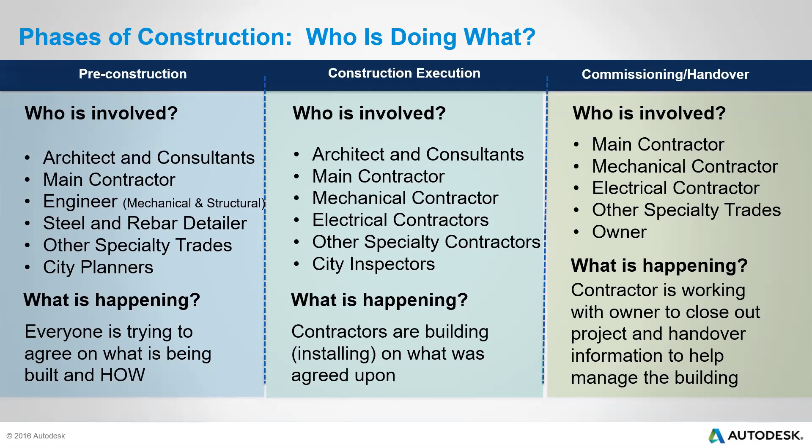So before we go into the details of the pre-construction workflows, we'll look at the phases of construction so we can have an idea of who is working in what area. We have the pre-construction, which we'll be talking about. We also have construction execution, which is the actual process itself, and then commissioning and handover. For pre-construction, we have the architects, main contractors, engineers, and in this phase, what is happening is everyone involved is trying to agree on what is to be built and how it is to be built. That is the thing we'll be focusing on today. We'll leave the other areas and just move on to the flow of information.

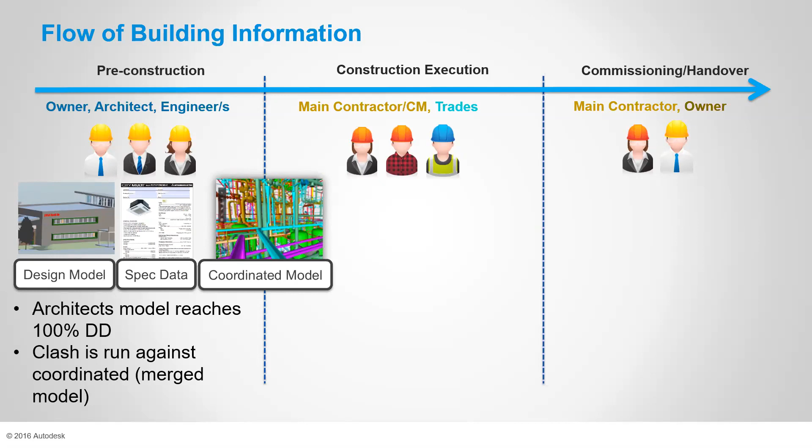So what happens is information starts from the initiation of the project until the commissioning and handover. And in the pre-construction stage that we're interested in, it starts with the design model itself, generates specification data, and you have the coordinated model, which spills over into the construction execution stage. So the output generally consists of your documented design documentation and running clashes to ensure that clashes are detected. We'll move on to the first aspect of the construction modeling phase for pre-construction.

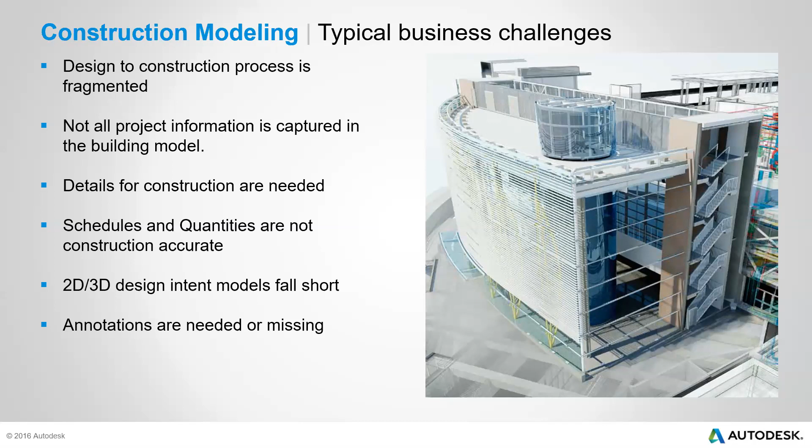Now, construction modeling has the following typical business challenge. The design to construction process is fragmented. It is not holistic, it's not in one place. And you find out that all the information required to construct the building is typically not captured in the model itself. You require extra details for construction, and even the schedules and quantities are usually not construction accurate, meaning that they are not accurate enough for construction information. You have annotations that are required or they are still missing.

So how would an ideal construction modeling workflow look like? You'll be able to have insight that would enhance the constructability of the project at an earlier stage in the process. You have access to multidisciplinary building content to enable you better manage the project. And you'll be able to extend your BIM data for use in clash detection, construction analysis, and fabrication. There are a lot more of these characteristics, but what we now have is the Autodesk workflow for construction modeling, which we refer to as the collaborative construction modeling.

It has a suite of different softwares where information flows from one to the other to achieve the following: create a constructability model, then to update the central model you're working on. You know, we said you're working in a project-centric process. To have direct access to all team members for clarity, to be able to organize your documents effectively, and to extend the workflows in Navisworks.

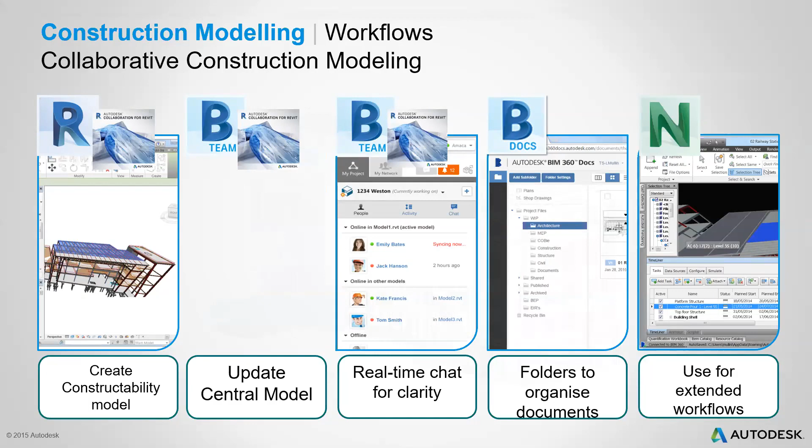So we'll look at a short video that gives an overview of this. Please mind that some of the names of these softwares have been merged into BIM 360 platform.

When construction companies receive design models, they will likely need to create a constructability model to add more detail to the project. Using tools such as Autodesk Collaboration for Revit, BIM 360 Team, and BIM 360 Docs allows the entire team to work on the constructability model from any location. To get started, the VDC or BIM manager will create a project on BIM 360 Team. After the project is created, they can invite team members to the project and choose what role they will have on the project.

Using Autodesk Collaboration for Revit, the VDC manager will then upload the project to BIM 360 Team. Once the file is uploaded, the other team members can access the project from within Revit and begin to create the constructability model. To collaborate in real time with other team members, use the Communicator tool. This will ensure that everyone is on the same page and will keep a record of the decisions that are made along the way.

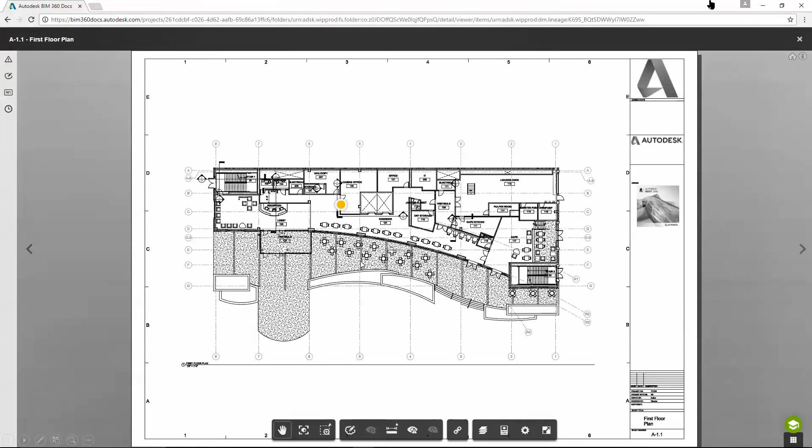You can also view the project's Sync with Central activity from the Timeline tab in the Communicator. Once the constructability model has been created, the model and documentation can be uploaded to BIM 360 Docs, so the entire team has access to the information from any location. Also, BIM 360 Docs allows you to create a folder structure, so project information can be organized and easily found.

Utilizing the cloud for collaboration ensures the entire team has the latest project data whenever they need it. It also provides easy access to the constructability model for extended workflows, such as creating quantity takeoffs, project schedules, and clash reports in Autodesk Navisworks or BIM 360 Glue.

Okay, so that's the first workflow we have in the construction modeling process. The next is construction detailing, which entails you creating detailed schedules, communicating these details using advanced drafting tools, and ability to have revisioning and markup included.

Many construction companies are using Revit to develop detailed 3D constructability models. However, most job sites are still using 2D drawings. This requires the VDC team to produce 2D representations of the constructability model using Autodesk Revit's advanced tools for drafting and scheduling. Because your 2D drawings are outputs from your 3D model, if something changes in one view, all the others are automatically updated. Revit also provides the ability to create 3D views with exploded details, which allows you to better convey the design and intended installation to workers on site.

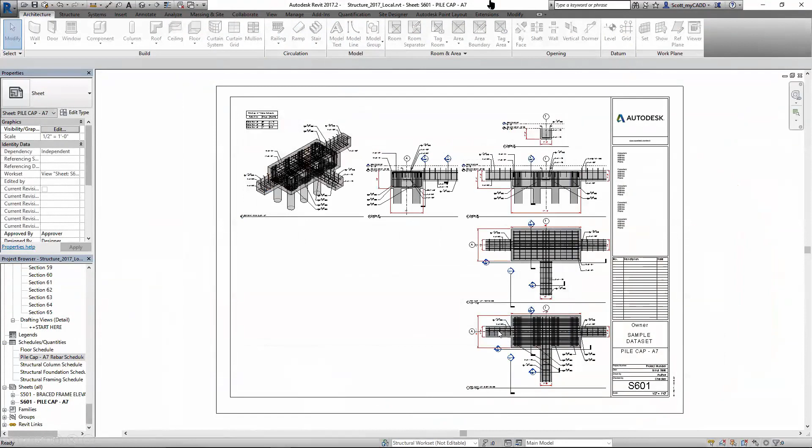Many subcontractors use a 2D workflow to produce shop drawings or communicate with their team in the field. The general contractor or architect can provide subs with 2D background drawings created in Revit for use in AutoCAD. This allows them to continue their work in one of the most powerful detailing engines available to produce their 2D documentation. With cloud connectivity to AutoCAD 360 or BIM 360 Docs, you can easily share documentation for markup and review with the entire project team, regardless of their location.

No drawing set is complete without descriptions of the materials and the assembly details, which is why adding annotations, line work, detail components, schedules, and quantities is a crucial phase of the complete BIM workflow.

Okay, so what we've been doing so far is focusing on the pre-construction stage, which is to ensure that we have sufficient information, enough to verify if the project can be constructed, and to handle the scheduling, the quantification, all the things that should go on before the project starts, that if handled very well, would minimize the risks that are typically associated with the construction project.

So we'll go on to the quantification workflow, the process, and look at the typical business challenges faced by construction professionals. For quantification, the issues are that we need to have more accurate and reliable material quantities and cost estimates, and to be able to reduce the risks to profits on the project that come from exceeding budgets, and to reduce the manual processes that take so much time, are error prone, and can result in having inaccurate estimates.

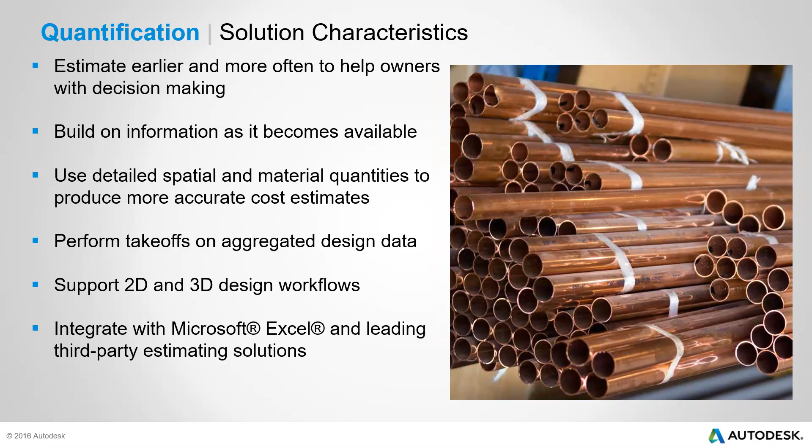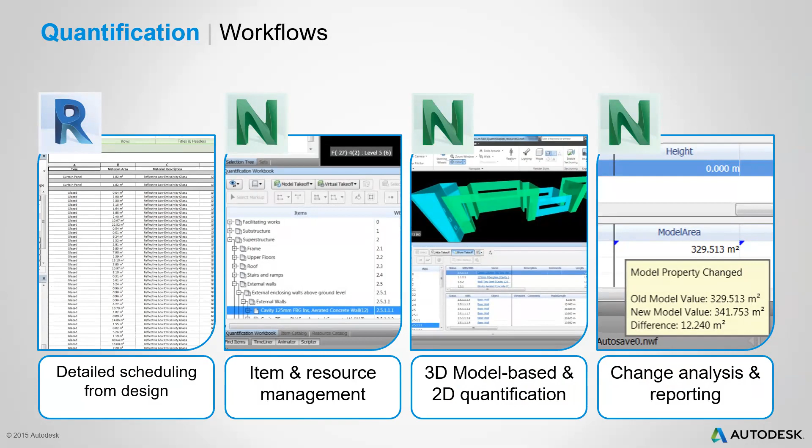So we'll go on to the workflow for quantification, which is split into the detailed scheduling from design using Revit, item and resource management, 3D model-based and 2D quantification, change analysis and reporting using Navisworks. So you can see that what we're doing is pairing the software, like I said before, as information flows through the entire construction timeline, it also flows through the software as well.

So this short video gives us an overview. Today's estimating processes rely heavily on 2D documentation and manual counting of project elements and components, which can be error-prone and very time-consuming. Leveraging a model-based workflow for quantification can reduce the time it takes to generate project quantities and enables workflows for adding valuable construction information to project elements during the process.

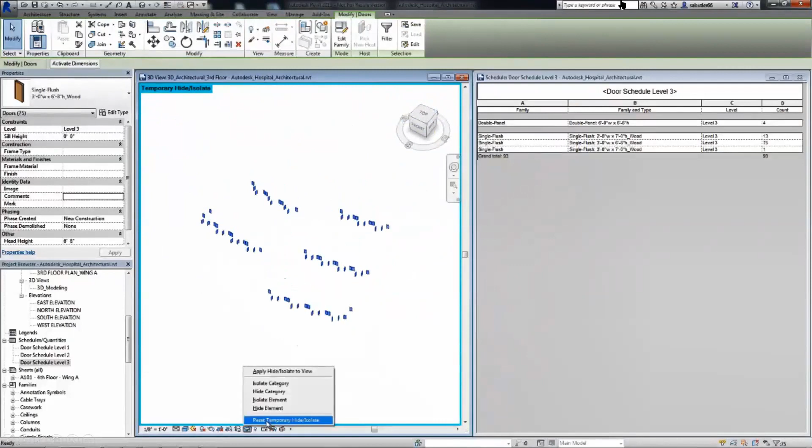Here we see how the Autodesk Construction Solutions offer several ways to gain access to the quantity information early in the planning process. By leveraging tools directly from the modeling applications, we can quickly get a high-level understanding of the project quantities. Schedules, or tables of data built from the model, created by the designer, can be used by adding counts and totals, or a custom table can be generated on the fly to give you the feedback and quantities from the model information immediately.

Here we are working with item and resource catalog information in order to classify the model elements further than the model authoring tools can. With the catalogs available, we quantify the model using intuitive and easy-to-use tools in Navisworks. The quantification workbook is our central location to create and manage the quantities within our model. We simply select an appropriate item within the catalog for quantification and can either drag and drop elements from the model to the appropriate items, right-click on any model element and select the catalog item to use, or use a toolbar to quantify the elements on the fly.

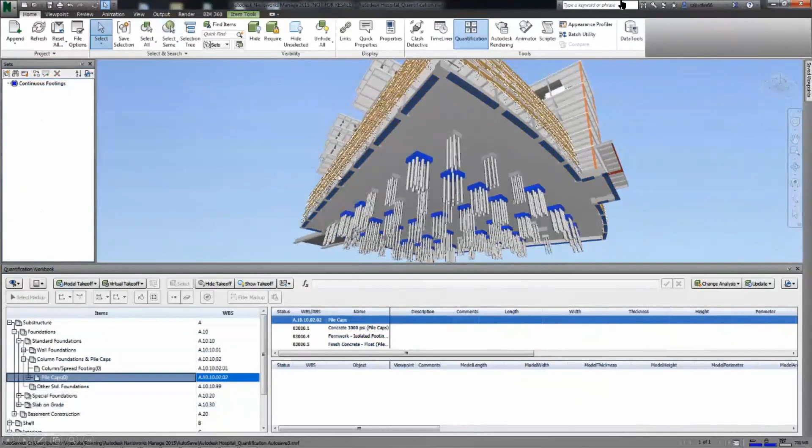As we see here, once elements from the model are quantified, their display in the model is updated with the color and transparency settings from the catalog. This ensures that we see exactly what has been quantified and can quickly toggle between showing the model elements that are done versus the elements that haven't. The workbook also leverages the item breakdown structures and the resource breakdown structures, in that we can see a roll-up of the total quantities for an item collection with its resources, as well as the individual elements' detailed data. To complete the quantification of the model, we simply continue to walk through the workbook and pull model quantities into the system.

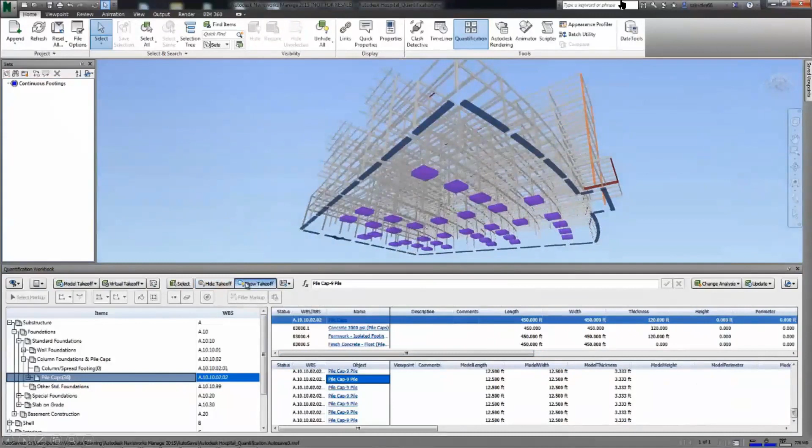2D takeoff can now be done using the new intuitive and easy-to-use 2D takeoff tools directly in Navisworks. This can be done by opening the item catalog, drilling down to the appropriate categories, and adding the new items we plan to take off. Drawings can be cleaned by using the Hide Background and Annotations tool in the Navisworks Quantification Workbook. This allows you to hide all of the notes, room names, section markers, and more.

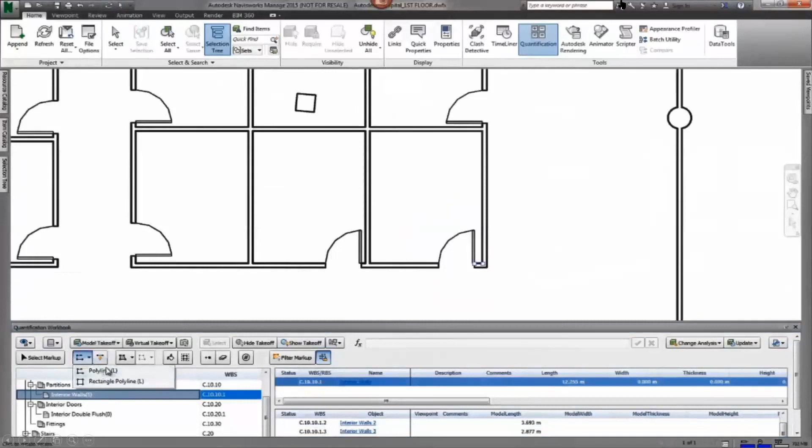We start by selecting the item type in the Quantification Workbook. Here we are taking off walls by selecting the wall line and then wall line type. We can also use other tools such as the Polyline tool or even the Rectangle Polyline tool. As we are taking off these items, they are being individually added to the Quantification Workbook, as well as being added together for a total. We can edit any line that we previously placed. We can add multiple elements at a time through the selection tree. Select the elements we want to take off to interior walls, and the Navisworks Quantification Workbook will be updated.

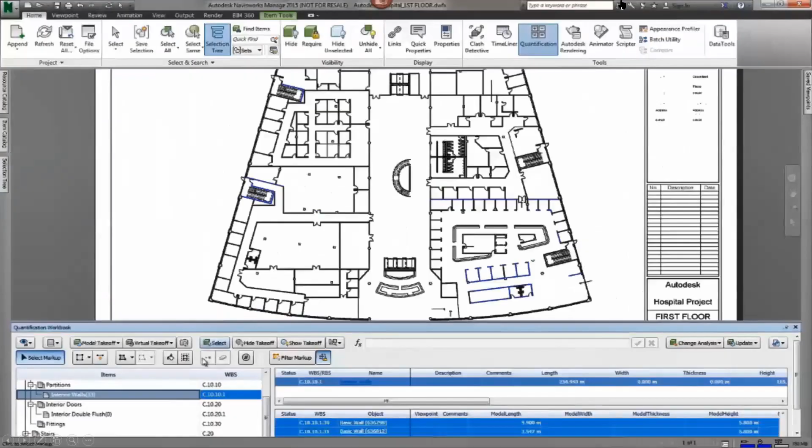Another challenge the quantification and estimating of building projects faces on a regular basis is the fact that project information inevitably changes. With a model-based approach and the use of the Autodesk Construction Solution, the management of changes is easy and effective. Because we are working with a model, the changes can be incorporated and tracked using Navisworks very easily. We see that the model within Navisworks has been refreshed, and we run an analysis for the quantities to see what has changed. An intuitive set of icons is showing us the changes and how they affect the quantification, along with tooltips that display the details of the changes. We can either accept the changes and they are incorporated into the new quantification, or we can remove the existing quantities and perform a fresh takeoff for the new or updated elements.

Okay, so that is for the quantification. Please, if you have questions as we go through each of the workflows and segments, just type it in now so that you do not forget.

Okay, we'll go on to pre-construction coordination next. Now, what are the typical challenges of pre-construction coordination? Projects are becoming more complex while delivery times are reducing. We have contributors at varying skill levels. Some are using 2D only, some are using Revit, some are fully BIM compliant, some are even using other software that gives them different file formats from what the team is using.

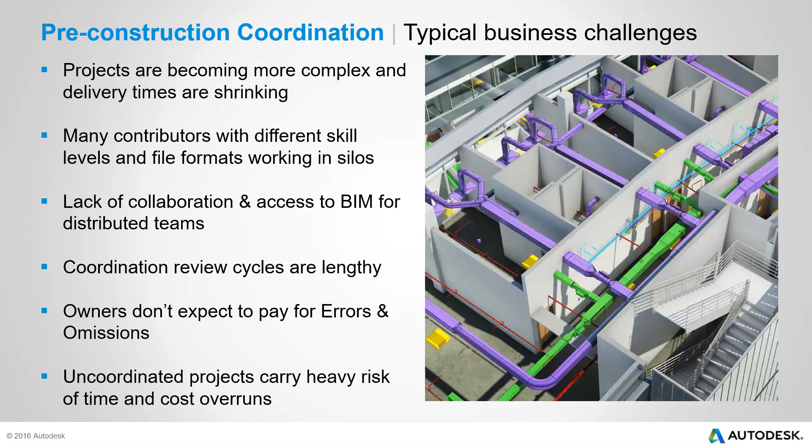We have a lack of collaboration and access to BIM for distributed teams. Coordination review cycles are quite lengthy, and owners typically do not expect to pay for mistakes that come from the team. So, what should the solution look like? You should have access anywhere at any time to the latest project models and data.

And the Autodesk solution helps to speed up project reviews and ensures that multidisciplinary teams can quickly identify and resolve pre-construction coordination issues. You can see this image here where the undetected clash has led to this creative solution. You should be able to have cloud-connected workflows for BIM coordination, collaboration, and analysis to ensure that all of these errors are detected early in the design process.

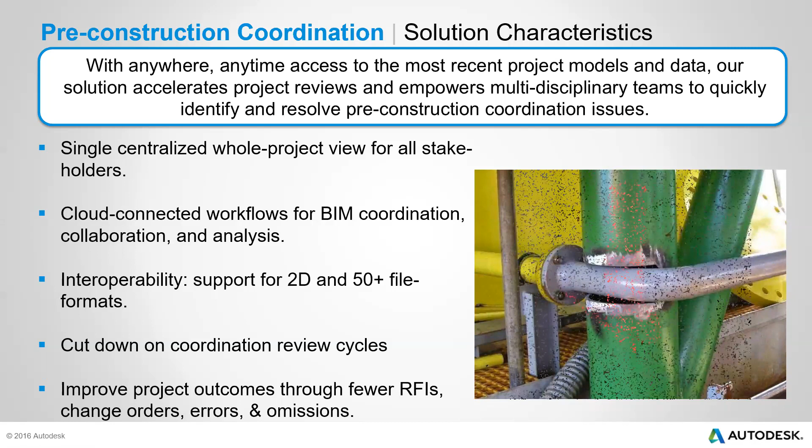So this is what happens when you carry out the pre-construction coordination properly. You detect such errors early enough and you can correct them without having to get to site to create on-the-fly solutions. You also have support for 2D files and 50 plus different file formats using the Autodesk solution. So the problem of being on another software or the file format being incompatible is resolved.

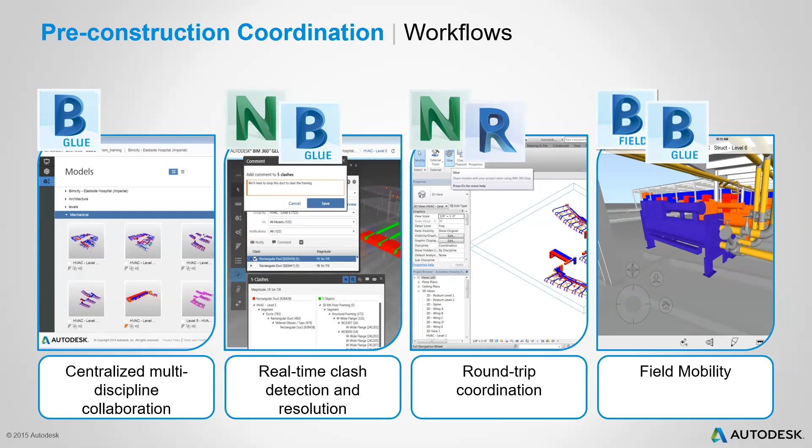So for the pre-construction coordination workflows, we have the following flow: from centralized multidisciplinary collaboration to real-time clash detection and resolution, round trip coordination, and field mobility. These are all different workflows that we'll walk through one after the other. We start with the centralized multidiscipline collaboration using BIM 360 Glue to manage all the different file formats, the versions, to create markups, and to send notifications and one-click access to BIM to all the professionals on the project. This next video gives us an overview.

Centralized multidiscipline collaboration is simple with Autodesk BIM 360 Glue. The first step in team collaboration is uploading discipline-specific project models to the BIM 360 Glue service. This can be accomplished using the BIM 360 desktop application. Simply select Upload Files, where you can drag and drop your project file or browse your computer. BIM 360 Glue supports over 50 file types, ensuring support for a wide range of design applications.

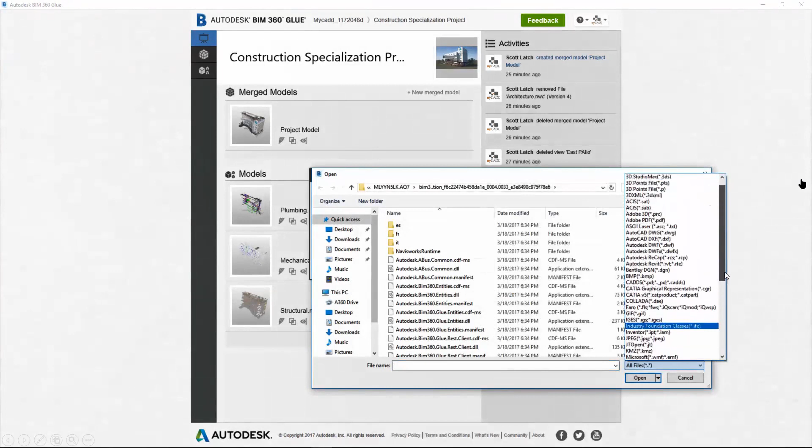A more efficient method to connect with Glue is to upload your models directly from the authoring application. This will allow you to regularly upload your model to BIM 360 Glue without leaving the application. In this example, we will upload a project model from Revit in just a few steps. First, create a 3D view in Revit that displays all the model information you'd like to include. It helps to rename the view to match the name you would like to have in BIM 360 Glue, but you can also rename the model before uploading to Glue.

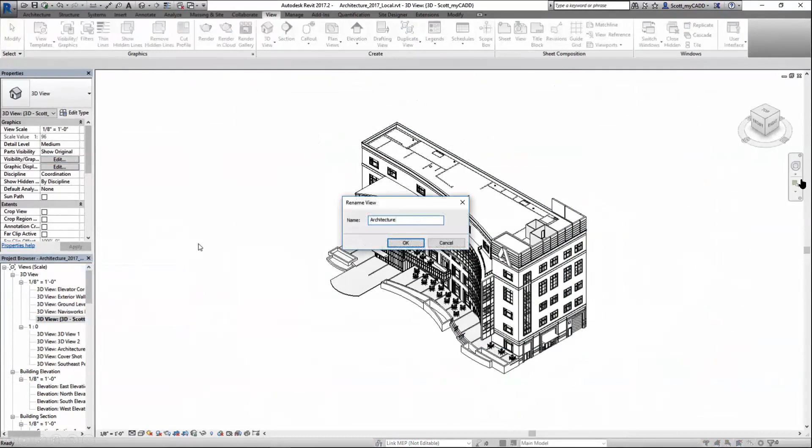Go to the Add-ins tab and click the Glue icon. You should have already been invited to a project or set up your own project on BIM 360 through the Account Admin settings. Select a project from the list. Now select a view to upload as your model. Choose the 3D view you have created and click Glue it. A status bar showing that the model is uploading appears, and you will be informed that your model is being glued. Once the model has been successfully glued, you will be notified. This process should be repeated for all the project models.

We now move to the BIM 360 desktop application, where we will merge the discipline-specific models that have been uploaded. Much like uploading the project models, merging can be accomplished in just a few steps. First, in the Merged Models section, select Add Merged Model. This will open a dialog box showing each of the projects that have been uploaded to BIM 360 Glue. Select the models you would like to merge, give the merged model a name, and select Merge Models. This will open a view of the merged model where you can check for clashes, create views and markups, and notify the team of this activity.

As projects continue to move forward, having the most up-to-date project documents is critical. BIM 360 Glue allows you to view the version history of any of the uploaded models. To see the current version of a model, hover the cursor over a project. To view the version history, right-click on the model and select View Details, which opens a dialog box where you can see a list of versions in the lower right corner.

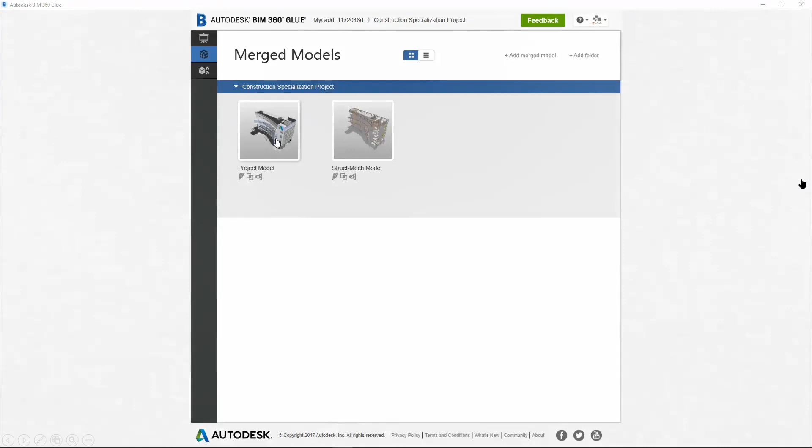Once the models are merged, you can begin to perform various collaboration tasks, such as checking for clashes or creating views with markups. In this example, we will create a view and create a markup that can be communicated to various team members. First, open the merged model. Notice the tools in the upper right-hand corner. The first thing we are going to do is turn off sections of the model using the Models tool. This allows you to limit the elements visible in the view you want to create.

Next, we will create a view by selecting the Views tool. In the Views dialog box, notice you have the option to create views just for yourself or a shared view. In this case, we want to share this view with the team, so we will select the Shared Views section. Now, click on Add View, give the view a name, define who has access to the view, and click Save. Now, we're going to navigate away from the view to see how easy it is to get back to it once it has been defined. It's as easy as selecting it in the Views dialog.

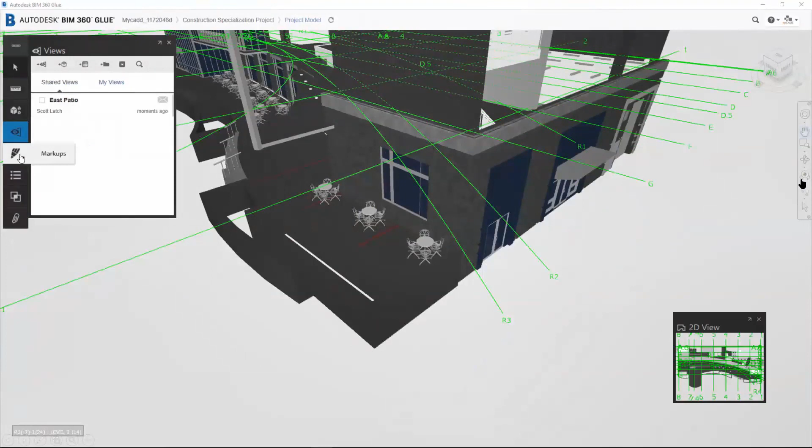Now, we will create a markup in this view. Simply select the Markups tool and click Add. This will open a palette of markup tools at the top of the window. Let's change the color of the markup. Select the Freehand tool and draw in the view. Then select the Text tool to add a note and click Save. Notice the markup is specific to that view. When I navigate away from the view, the markup disappears. If I go back to the view, the markup will reappear.

All activities are tracked in BIM 360 Glue, ensuring the team is aware of everything going on with the project. You can see the activities specific to the merged model by selecting the Activities tool. You can also see the activities for the entire project by selecting the project name or by going back to the main project page and viewing the Activities section on the right-hand side.

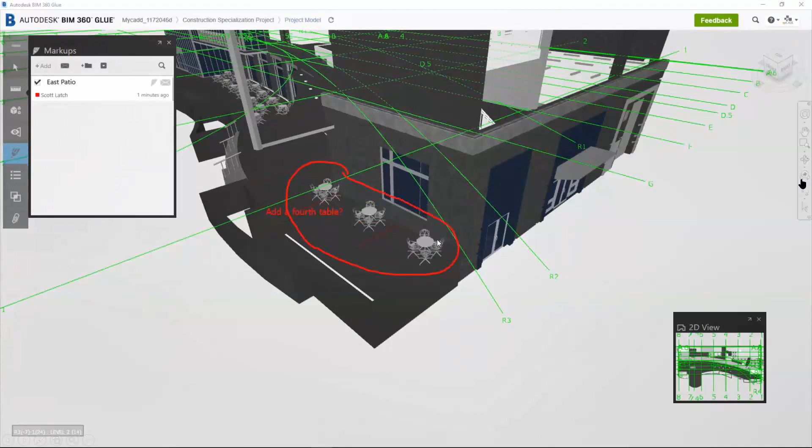Now that we've created a markup, we're going to communicate that markup to the owner, because he isn't always monitoring the activity in BIM 360 Glue, and we want to make sure he's aware of this change. We are now back at the markup we created earlier. To communicate this view to the owner, select the Notify icon in the Markups dialog. Select the owner and add an optional message. Then click Send. The owner will then receive an email notifying him of the markup. You can even go into the activities, select multiple items, and notify a team member about them.

As you have seen in this video, it's easy to upload models, merge them, create views and markups, and keep the team up to speed on all the project activity, whether they are in BIM 360 Glue or not.

So if you see the trend that the different workflows we've been showing you reveal, it's that the cloud is the point where you can carry out a lot of these activities. Don't forget, it is not limited to any location. You can gain access from mobile devices, from your iPad, from a laptop, whether you're on site or you are in the air, making sure that the anchoring to the computer in the office is removed.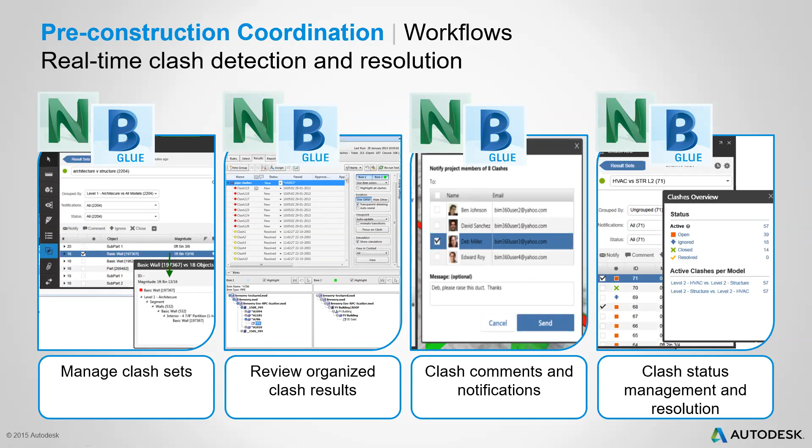So we'll go on to the next workflow in the pre-construction coordination process, which is real-time clash detection and resolution. The two software titles we'll be using are Navisworks and BIM 360 Glue, which will help us manage clash sets, review organized clash results, clash comments and notifications, and give clash status management and resolution. This next video gives us an overview. Yes.

Clash detection done on the job site usually results in change orders, causing material waste, added cost, and added time to a construction project. Using Autodesk BIM 360 Glue's Clash Review allows the team to find and resolve potential issues right in the cloud before construction begins, resulting in less issues during construction. Let's start by checking for clashes using one of the merged models already in the project.

In the Merged Model view, start by selecting the Clashes tool in the Tool palette. Click New in the Clashes dialog to create a new clash set. Select the portions of the model you want to compare, give the clash set a name, and click Find Clashes.

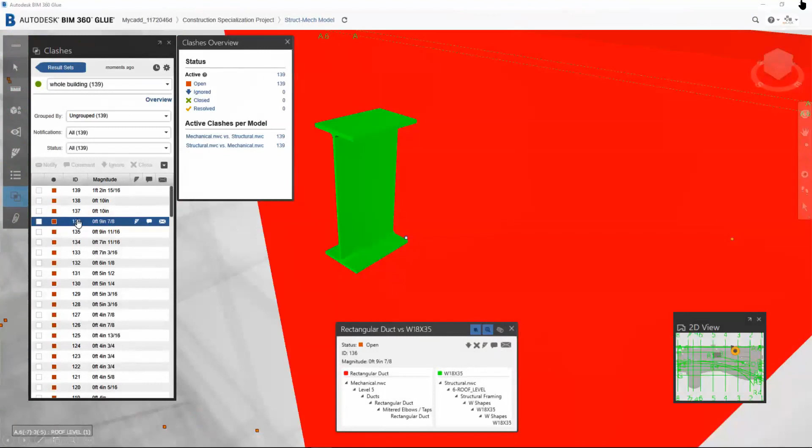You can see the results of the review in the Clashes dialog and in the model. In the Clash Results dialog, you can see the status and click to navigate to each of the clashes in order to view the objects that are clashing. Navigating from clash to clash is a quick and easy process.

Now that you know where the clashes are located, you need to communicate these issues to the team. Using BIM 360 Glue makes this process easy by adding a markup or comment to each of the issues, or leave them as is.

Then select a series of issues and notify the team members via email.

In addition, anyone with access to the project in BIM 360 Glue can also view the clash set, comment on clashes, notify other team members, or change the status of a clash.

Now that clashes have been found in the model, the individual model contributors can also review the issues directly in their design application using the Clash Pinpoint tool that is part of the BIM 360 add-in.

To use the tool, open a view that contains the clashing elements. In this case, we're going to open a 3D view so we can see the entire building. On the BIM 360 add-in, select the Clash Pinpoint tool.

Select the project and click Next. Select the clash result set you would like to use and click View. You now see the clashes we previously notified the team members about via email.

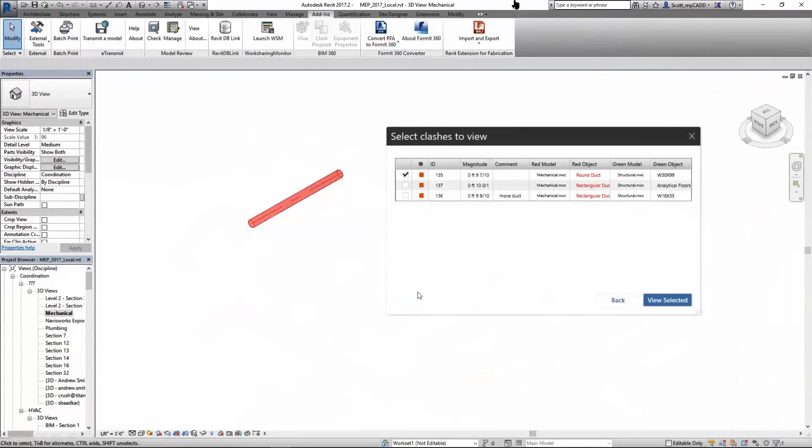Using the BIM 360 add-in tool allows each of the individual model contributors to easily find the clashing elements, fix the issue, and upload a new model to BIM 360 Glue once the issues have been resolved.

Over time, the number of issues in the clash results set will go down as the team resolves them. This will produce a better coordinated project that will be built on time, on budget, and with less waste.

So that is the end of the second workflow in the pre-construction coordination. Next we have the round trip coordination, which involves the use of Revit and Navisworks used together.

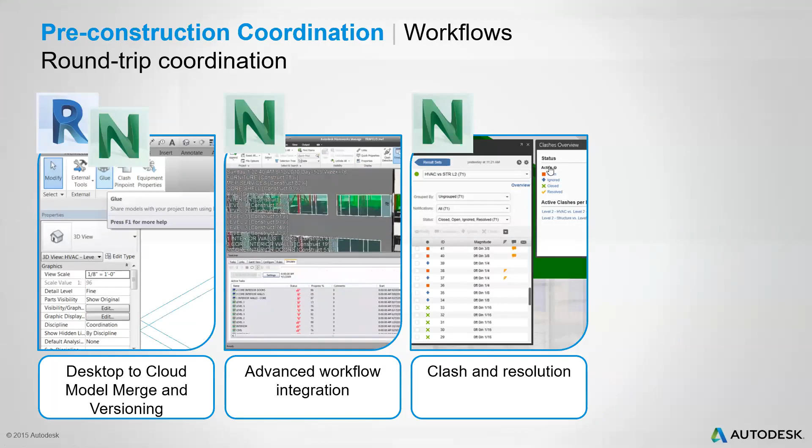Desktop to cloud model upload, merging, clash detection, and quantification are made easy with round-trip coordination.

The first step is uploading discipline-specific project models to the BIM 360 Glue service. To do this, go to the Add-ins tab and click the Glue icon. Select a project from the list.

Now select a view to upload as your model. Choose the 3D view you have created and click Glue it.

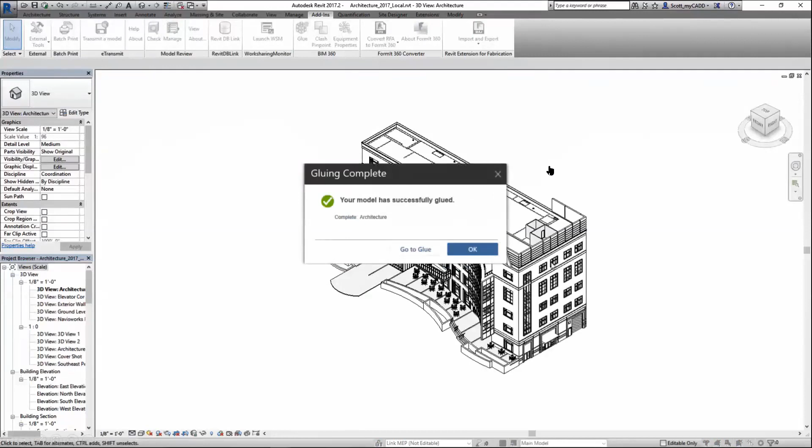A status bar showing that the model is uploading appears, and you will be informed that your model is being glued. Once the model has been successfully glued, you will be notified. This process should be repeated for all the project models.

We now move to the BIM 360 desktop application, where we will merge the discipline-specific models that have been uploaded. Much like uploading the project models, merging can be accomplished in just a few steps.

First, in the Merged Models section, select Add Merged Model. This will open a dialog box showing each of the projects that have been uploaded to BIM 360 Glue. Select the models you would like to merge, give the merged model a name, and select Merge Models.

This will open a view of the merged model where you can check for clashes, create views and markups, and notify the team of this activity.

Now, let's check for clashes using one of the merged models already in the project. In the Merged Model view, start by selecting the Clashes tool in the Tool palette. Click New in the Clashes dialog to create a new clash set. Select the portions of the model you want to compare, give the clash set a name, and click Find Clashes.

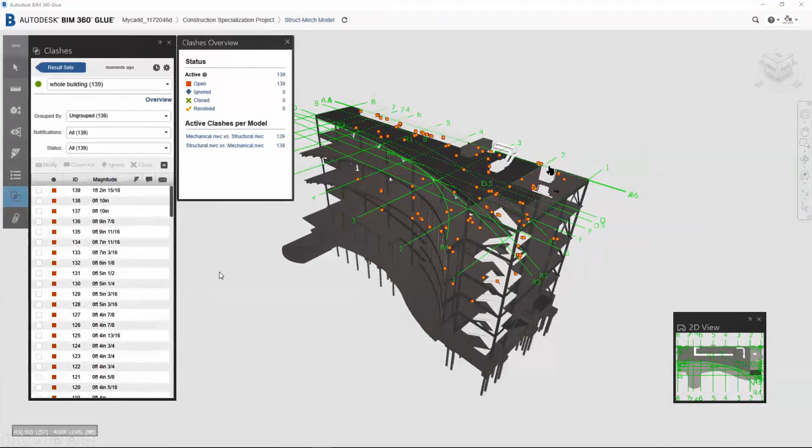You can see the results of the review in the Clashes dialog and in the model. In the Clash Results dialog, you can see the status and click to navigate to each of the clashes in order to view the objects that are clashing. Navigating from clash to clash is a quick and easy process.

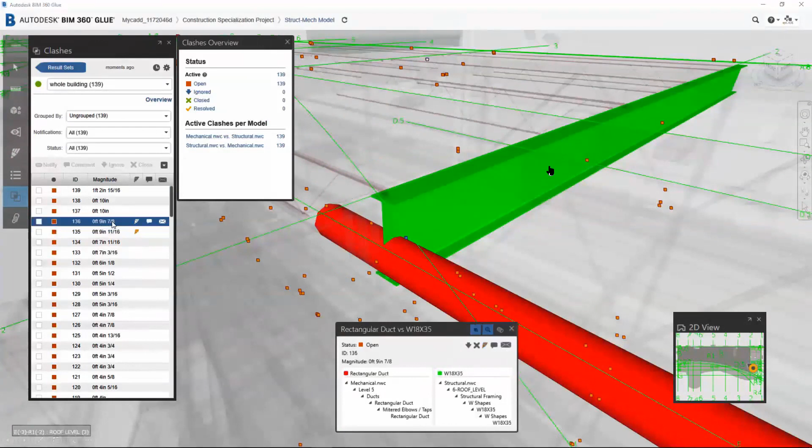Now that you know where the clashes are located, you need to communicate these issues to the team. Using BIM 360 Glue makes this process easy by adding a markup or comment to each of the issues, or leave them as is.

Then select a series of issues and notify the team members via email.

In addition, anyone with access to the project in BIM 360 Glue can also view the clash set, comment on clashes, notify other team members, or change the status of a clash.

As the project progresses, the models uploaded to BIM 360 Glue can be opened in Navisworks Manage and used for advanced workflows, such as scheduling and quantity takeoffs.

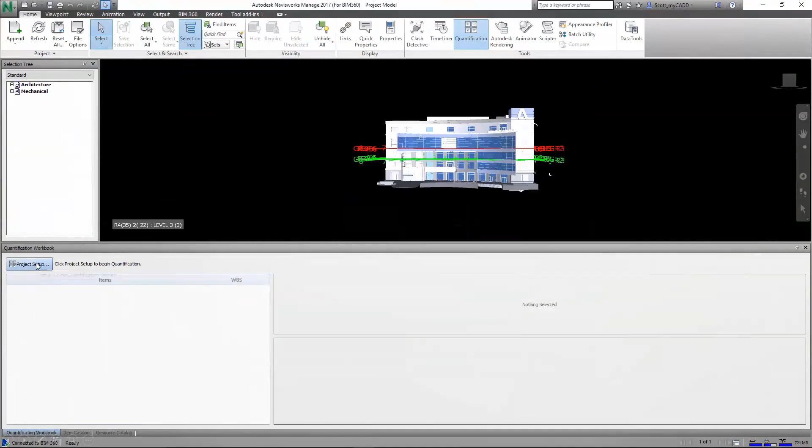In this case, we'll begin with the process of creating a quantity takeoff. We'll start by clicking on the project setup in the quantification workbook and select the catalog. Then select the project units, takeoff properties, and click Finish. This creates the data structure for your takeoff.

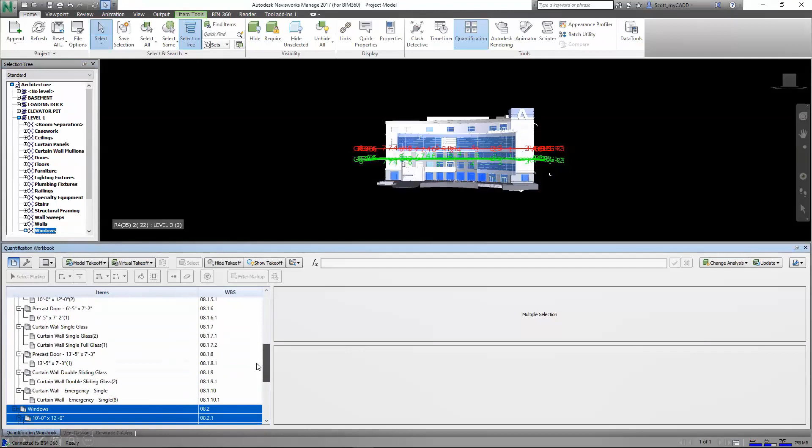It's then as simple as selecting elements in the model or selection tree and dragging them to the corresponding section of the quantification workbook. Once the quantification takeoff is set up, it can be updated as the model changes. You can also use 2D data sources to generate the takeoff for items with no associated model geometry or properties. Using these processes and keeping the project data up to date in the cloud provides the ability to do round-trip coordination.

So the last of the pre-construction coordination workflow is field mobility, which ensures that you are able to share information with stakeholders in the field. You can gain one-click access to the project files. You can easily navigate even on your mobile devices, and you can add comment markups and notifications.

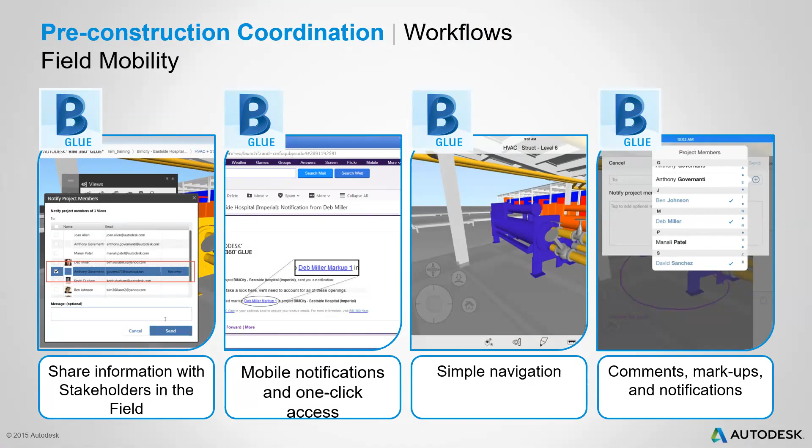Often, there is a need to share the information in your models with stakeholders who either aren't directly involved in the coordination process, like field personnel, or just need progress checks, like an owner or project manager. This is where mobility can play a key role in extending the value of a coordinated model to these consumers.

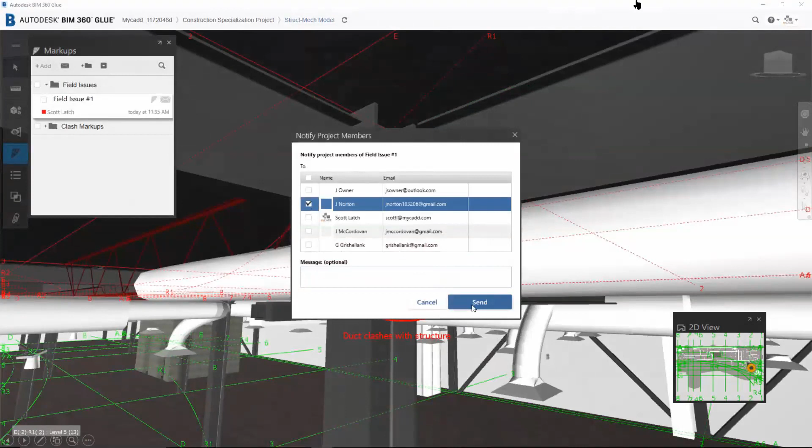The notification system built into Glue allows you to select the team members you wish to collaborate with, type out a personal note, and send an email to them all in one simple step. Once this is done, you can go back to your task of visual coordination without ever stopping the process here in Glue. The result is time saved in sharing information with the key project stakeholders and ensuring the team members needed are communicated with securely and efficiently.

When the email is received, all you need to do to view the model and markup that was shared is to select the hyperlink within the email that Glue sent. Glue will do all the heavy lifting, in that it will automatically launch, will load the exact model and version that contains the markup, and take the email recipient directly to the markup, streamlining the collaboration process with the mobile user.

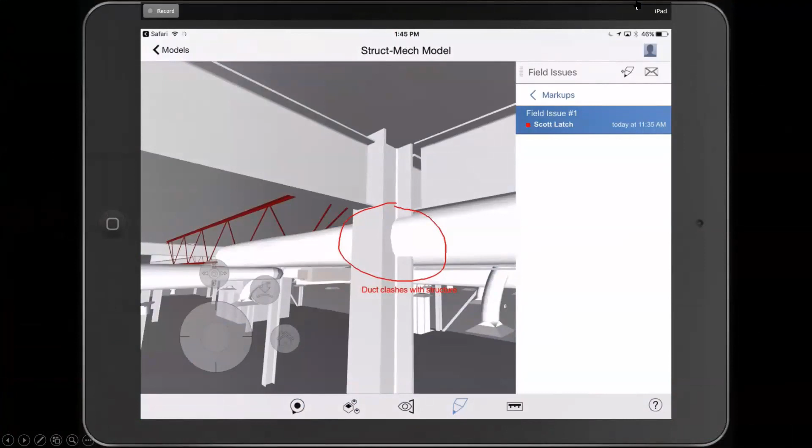From here, we can interact with the model using straightforward navigation, using gestures for zoom, pan, and orbit. Tools for measurement, where we can verify model dimensions while we are in the field, and even showing the X, Y, and Z differences. Finally, the remote user can send a comment back to another team member directly from the mobile app.

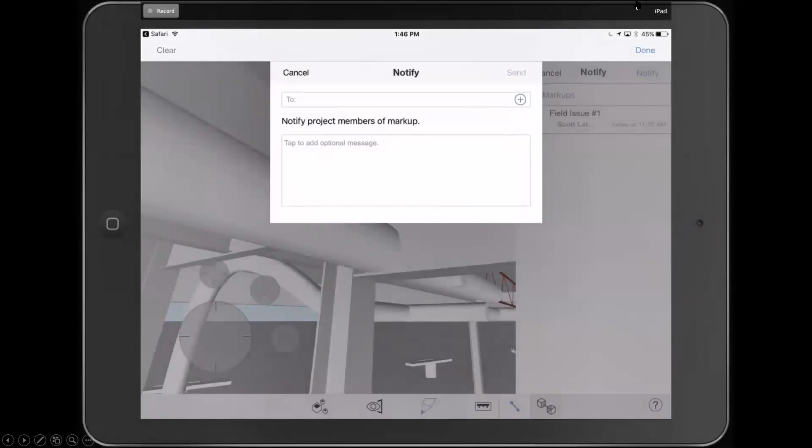Using the BIM 360 Glue mobile app provides access to the project regardless of the user's location, and provides the remote user with tools to collaborate with other team members.

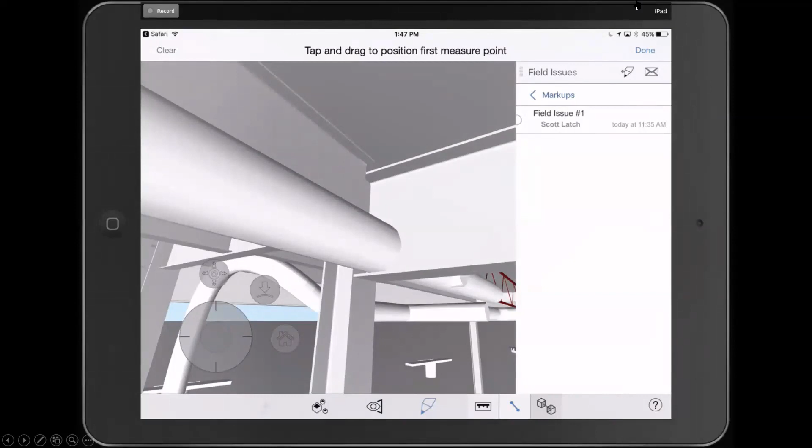Okay, so we'll move on to the planning and logistics phase. What are the typical business challenges faced in this phase?

The ideal situation would be that we are able to quickly visualize the proposed project within the context of existing conditions, that will be able to identify and resolve potential conflicts and address environmental and safety concerns before the construction even starts. That we will be able to quickly assess and quantify the impact that changes in the design and scope would have on all subcontractors and even on the overall project plan, and to explore options that you have based on trade-offs as you consider how to execute the work.

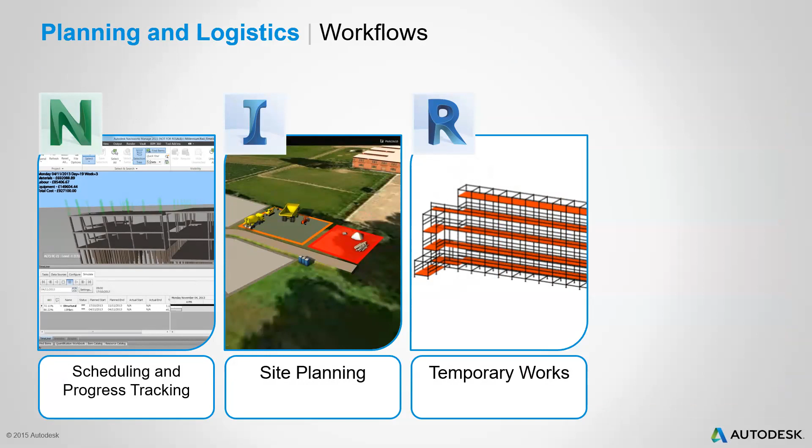So the workflow we have for this is a combination of three software that will manage the scheduling and progress tracking in Navisworks, site planning in InfraWorks, and temporary works in Revit and Civil 3D. So we start with the scheduling and progress tracking workflow, as shown in this video.

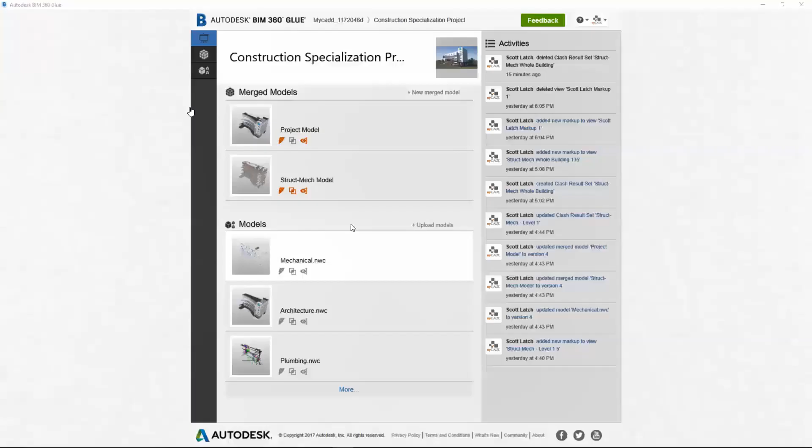Core to planning is understanding your schedule and project plan so you can assess the impact of changes and track progress. With cloud-based BIM coordination, project teams gain virtually anytime, anywhere access to connected project information. Autodesk BIM 360 Glue helps you perform multidisciplinary collaboration and coordination review cycles faster, while making construction layout tasks more efficient.

In Autodesk Navisworks, we can open the models saved in BIM 360 Glue and perform extended workflows such as creating a project schedule. This is done by easily attaching model elements, even at a preliminary stage, to a schedule of tasks. Elements can be selected from a list, grouped together with selection sets, or simply highlighted on the screen and dragged and dropped to the appropriate tasks.

Once we have a preliminary schedule and 4D simulation complete, we can easily export the data to an external third-party project scheduling application, such as Primavera or Microsoft Project, where it can be further refined, then linked back into Navisworks.

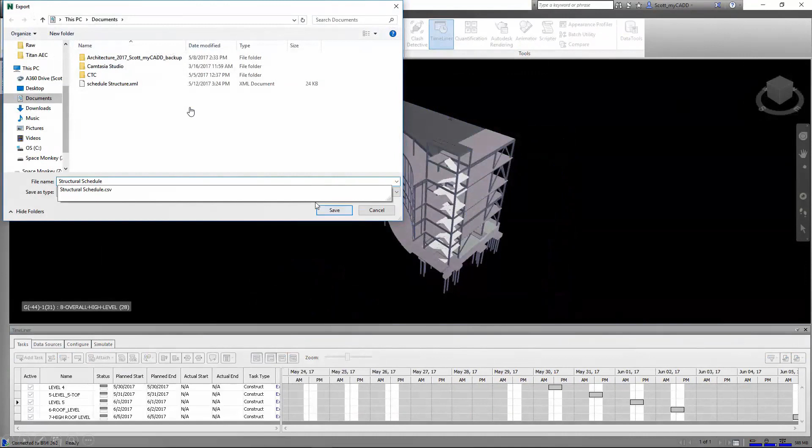BIM 360 field checklists provide the ability to collect data, such as daily updates, which allow contractors to better manage the process of daily job site performance reporting by providing a digital workflow that enables transparency of the collected information, which can be accessed by the project team at any time.

By capturing the information within the BIM 360 ecosystem, you can better understand and manage risk, as well as gain insight into trends and analytics that expose root cause detail and allow you to track the planned work schedule to the actual progress in 4D simulations.

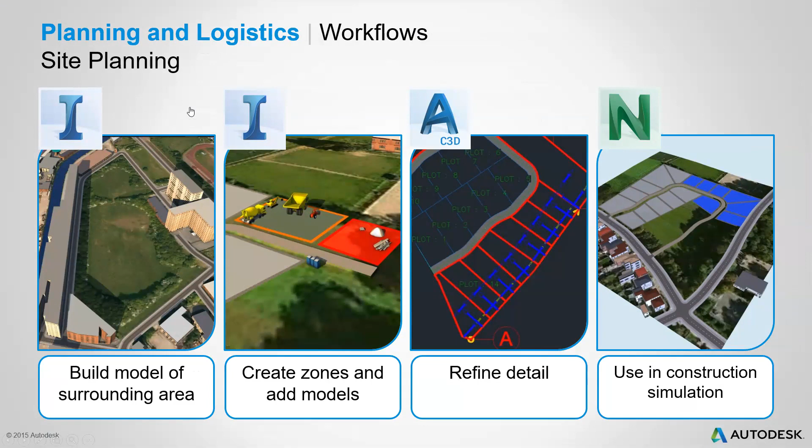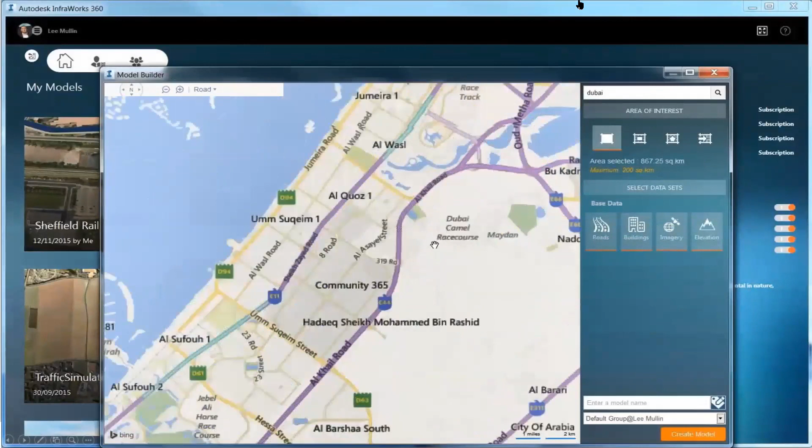Construction projects are more than just the building. There's the site as well. Using tools like Autodesk InfraWorks, Civil 3D, and Navisworks provides the team with insight into how to manage the site and the impact the project will have on the surrounding area.

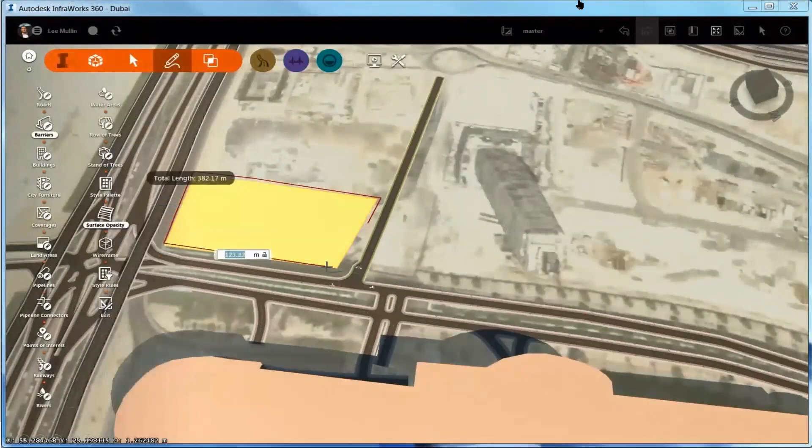To begin, site planning tools like InfraWorks allow you to quickly create a model containing terrain, roads, buildings, water sources, and aerial imagery. This allows you to start making plans for the site at different phases of the project by easily creating zones for material layout, walking paths, and so on. Also, using library content for cranes, vehicles, and site trailers allows you to quickly populate the site with relevant equipment.

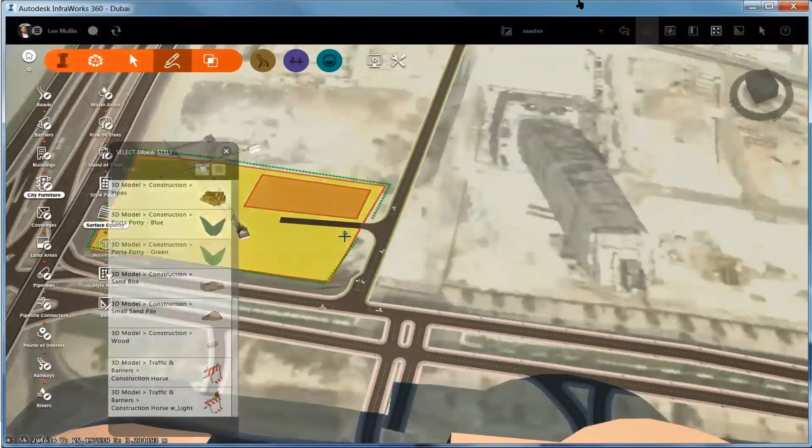Using these tools in InfraWorks allows you to quickly understand the context of the building and the effect the surrounding area may have on it. InfraWorks also has the ability to run traffic simulations, allowing you to look at alternate scenarios such as different entrance points to the site. Using the traffic simulator will provide the team with the understanding needed to lessen the impact on the surrounding area while maximizing the use of the construction site.

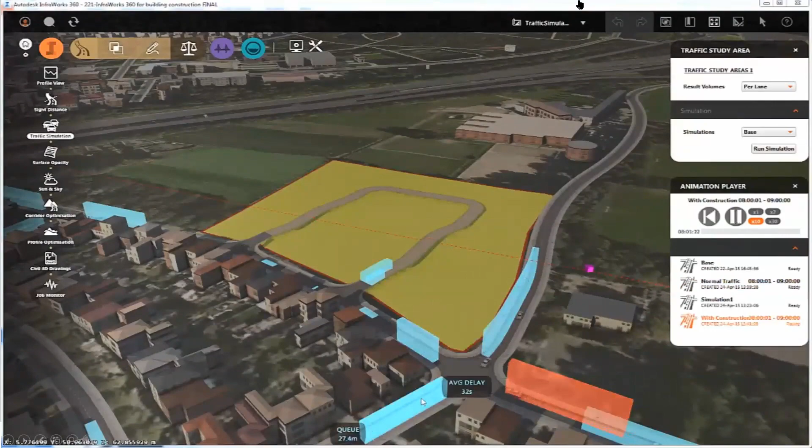As you continue to further refine the project site, you can leverage the Vehicle Tracking tool in Civil 3D to look at the movement of heavy equipment, such as cranes. This will ensure that you place materials, other equipment, and temporary site buildings in locations that allow for the equipment to move freely around the site.

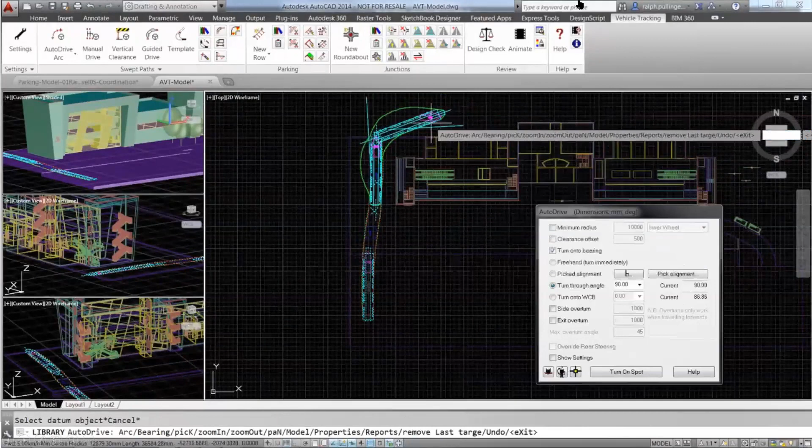Finally, you can export the site information created in InfraWorks into Navisworks and join it with project information created in other applications, allowing the team to link it to construction simulations and help visualize and communicate the site to workers.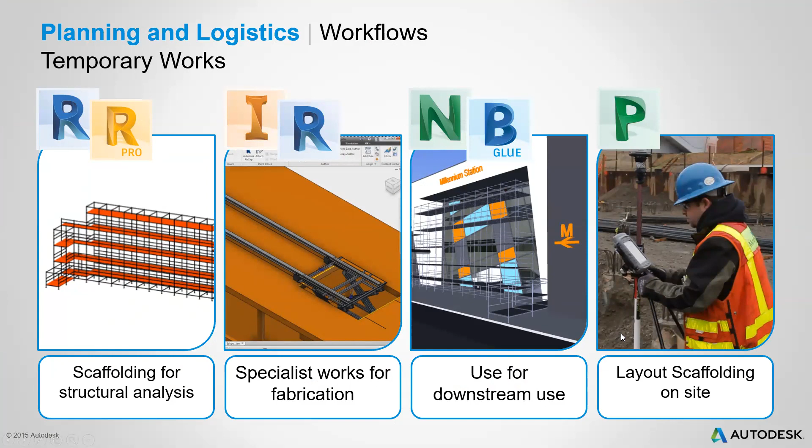The final workflow of the planning and logistics phase is the creation of temporary works, which would involve these different software tools. I'll go straight to the video to outline this process.

Temporary works are increasingly being modeled to take advantage of downstream uses such as layout, construction simulation, clash detection, and quantification, as well as obvious reduction in risk for health and safety. For example, a temporary scaffolding layout can be designed using Revit using custom scaffolding families.

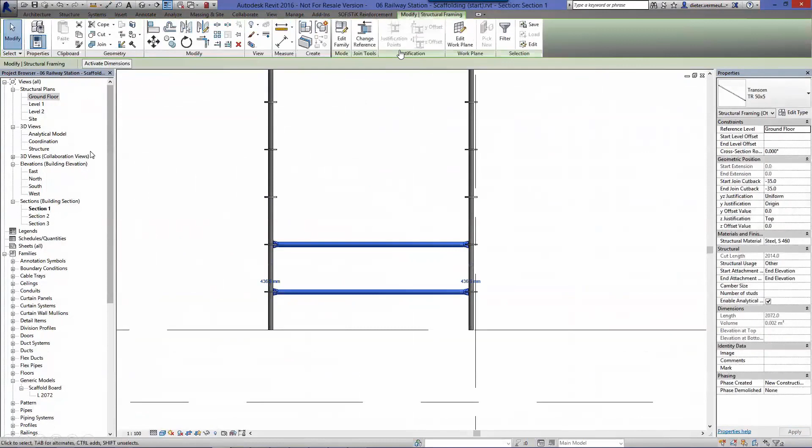The process to laying out the scaffolding is the same as laying out the building structure. Start by placing vertical elements of the scaffolding as columns and adjust their spacing as needed. Then place the horizontal elements as beams. Work in 2D and 3D views to ensure the scaffolding is being modeled correctly. Once the structure is complete, you can place the scaffold boards.

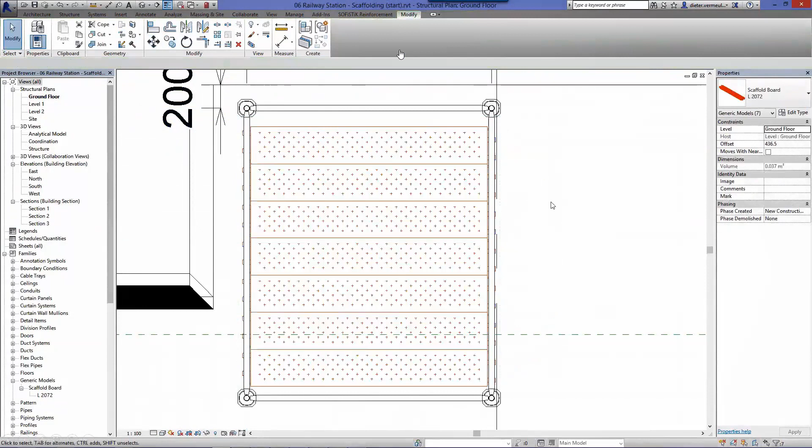After completing a section of scaffolding, you can use the Array tool to repeat it along the face of the building. Then, copy a group of scaffolding sections from level to level. Continue this process until you have completed the entire scaffolding structure.

Once a section of scaffolding is complete, robot structural analysis can be used to look at wind loads and load-bearing capacity. Any necessary changes to the scaffolding model can be brought back into Revit. This process will ensure that the scaffolding will perform as desired, resulting in a safer job site.

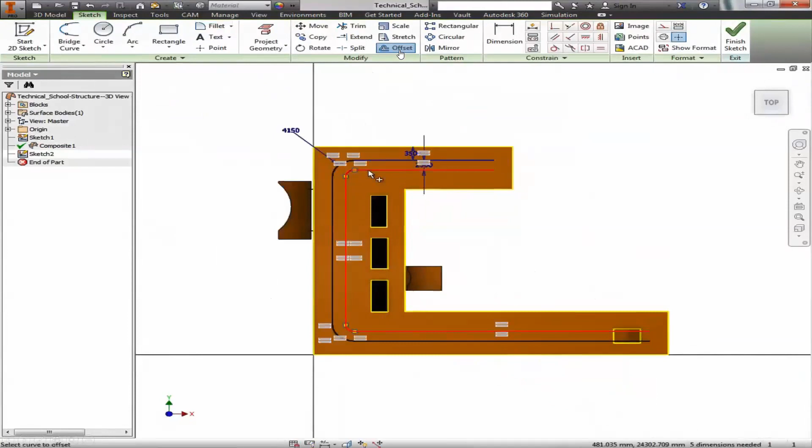Revit isn't the only application that can be used to design specialty structures. Inventor can be used as well, leveraging the Revit model as a background. Using Inventor allows you to use manufacturing parts already created in Inventor, rather than recreating these elements in Revit, which will increase the time to model and add unnecessary detail.

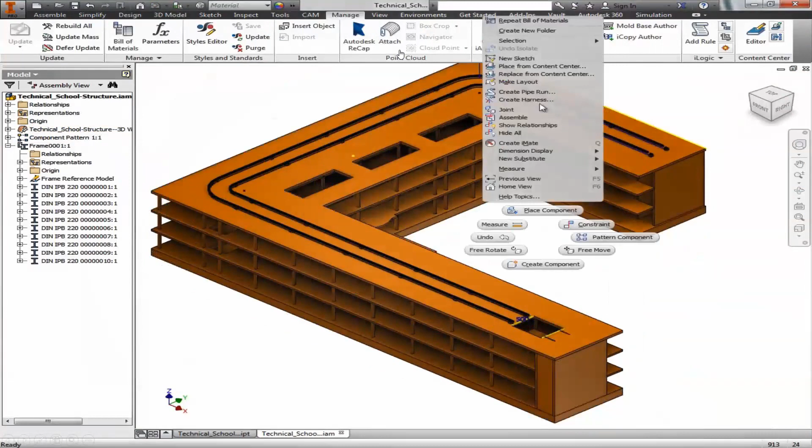Doing this work in Inventor also results in the ability to quickly generate a parts list or send parts to manufacturing directly from the application. Both the Revit and Inventor models can be brought into Navisworks for review from multiple parties, as well as used for accurate layout using point layout or clash detection against the program to ensure they are installed or removed in time.

Okay, so we'll now look at the preconstruction business development. What are the typical business challenges? What are you trying to achieve? The fact is that the landscape is becoming extremely competitive. The construction industry is changing rapidly. We have 3D printing now, so many other new technologies coming up. Projects are becoming more complicated and more involving. Customers are expecting more, and you need to differentiate yourself from the competition.

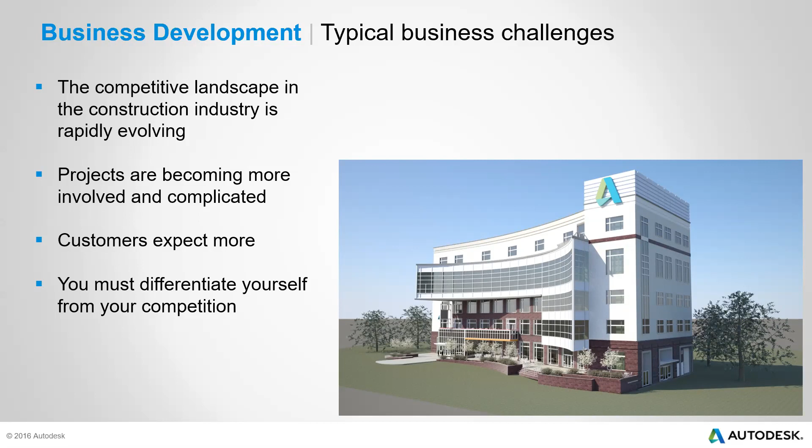So the business development phase shows you how you can set yourself apart and indicate that you understand the challenges faced and that you have the answers and the solutions to this. So what would the ideal business development solution look like? You would be able to create realistic and interactive simulations and visualizations for the consumption of your clients. You are able to easily generate multiple alternatives and communicate project information to stakeholders as well.

For the business development workflow, we have this connected workflow of Navisworks, online rendering, 3ds Max, InfraWorks, and ReCap Pro. That will take you through the process of showing that you understand how the project works, that you can present high-end visualizations, you can show the context of the project and how you intend to solve the problems you've identified, and to also visually verify site conditions.

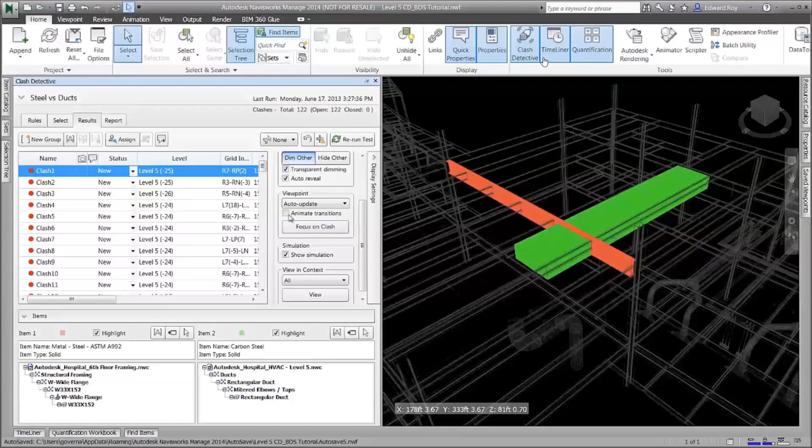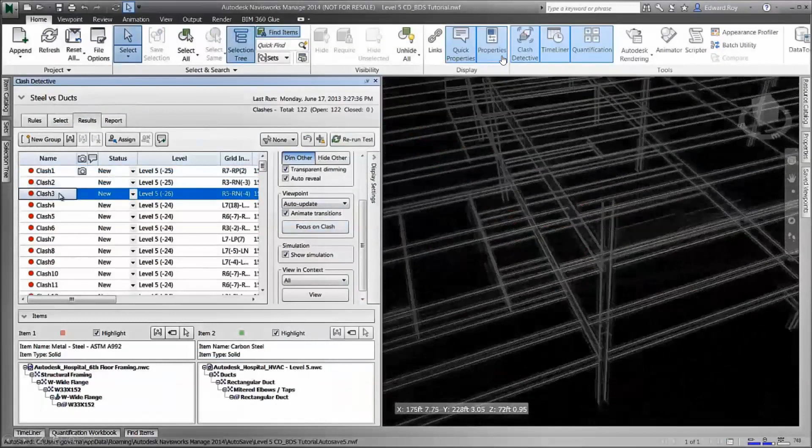We'll look at this next video. Business development and winning work is rarely only about the price or schedule of the proposed work. Using the power of a digital workflow will allow you to demonstrate that you understand the work to be completed and the challenges you will need to overcome. Autodesk Navisworks is a key tool to show your understanding of the project, whether to show issues between interfaces of trades, simulating the construction and potential solutions, or just getting a quick bill of quantities to estimate from.

With Navisworks' connection to the cloud, you're able to use the power of cloud rendering, which means that you no longer need to sit next to an idle computer for hours waiting for a single rendering. You can push your model to the cloud for rendering, and then you'll receive an email to download the render when it's complete. If you want really high-end renderings, you can use your digital data in Autodesk 3ds Max, Autodesk's Oscar-winning program for films, special effects, and scenes that look so real you may not know they're computer-generated.

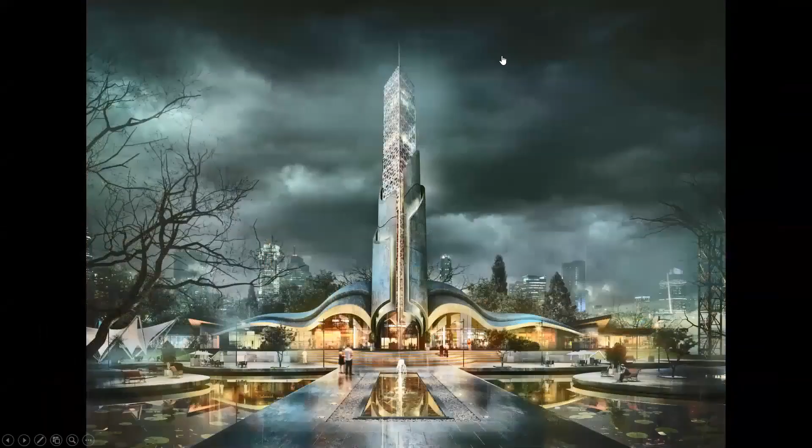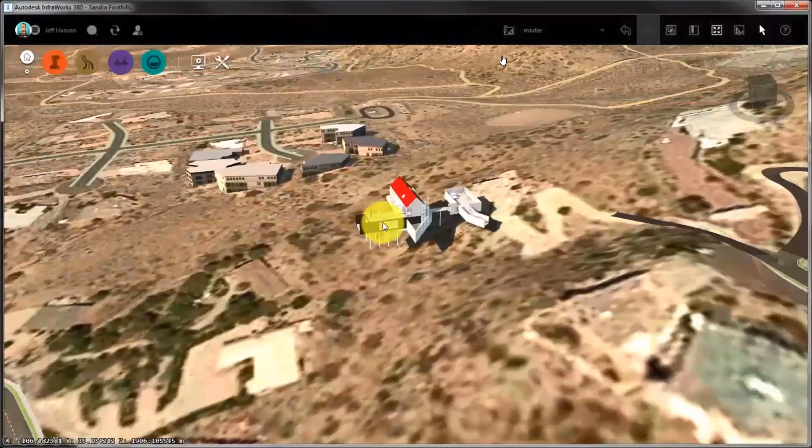When it comes to overcoming objections from the public and other interested parties, tools like Autodesk InfraWorks allow you to quickly place your digital models in the context of their surroundings with the ability to create a map with roads, water, buildings and terrain with high-quality aerial imagery for your presentations. Winning work can also mean understanding the existing and as-built conditions through a detailed scan. These scans in Autodesk ReCap and Navisworks give you the ability to reaffirm buildable conditions and analyze what you have to work with in the bid phase.

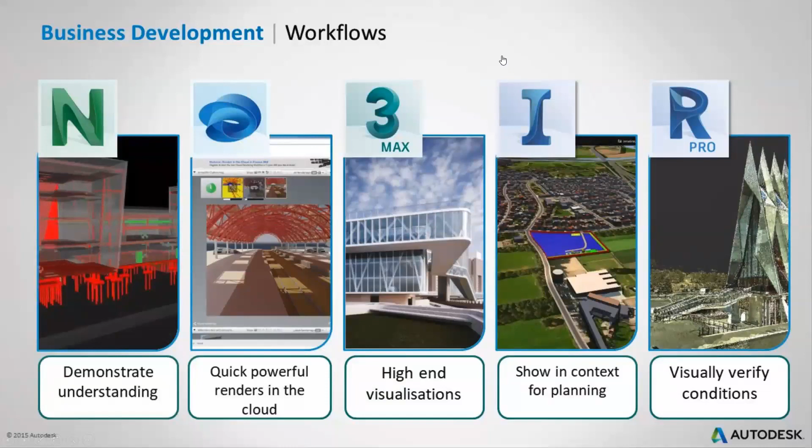As you can see with these examples, business development and winning work is rarely only about the price or schedule of the proposed work. Okay, so that brings us to the end of our presentation for today. We've covered a lot of ground, showing that when we break down the work processes that need to be completed, there are actually quite a number of different workflows. But I'm sure you've been able to identify one or two places where this will be useful to you in your businesses.